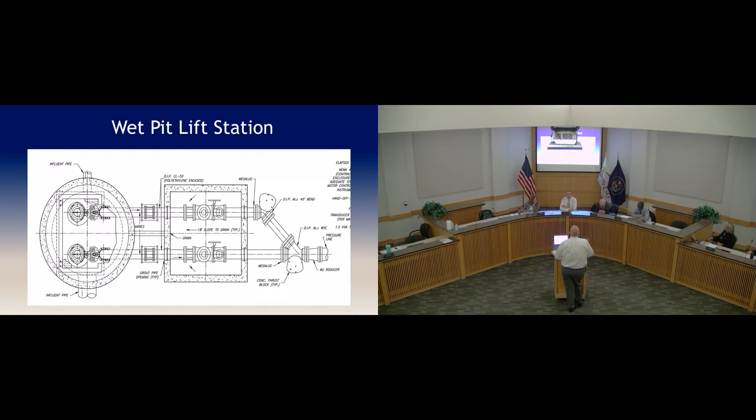The technology they have now, or at least the maintenance they've done, is they put the pumps on rails, so it's easier now to get the pumps out of the lift station using the rail system, as long as the rail system doesn't get beat up with the wastewater and the gases.

So stainless steel is always a good option when you put this kind of stuff together. The stainless does a lot better in wastewater than galvanized, which gets eaten away, and after 10, 15 years, you don't have rails anymore because they've disintegrated.

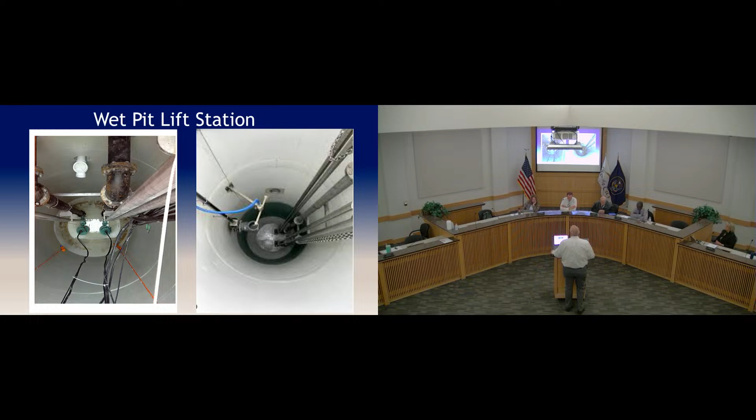So that's kind of a wet pit lift station. And then we go into the dry pit lift station.

Now I've got my engineer drawing, it's kind of busy, it's got a lot of stuff right there. But basically I just want you to see that it has two vaults, a wet well and a dry well. The dry well is where the pumps are, the wet well is where the wastewater is located. It just has basically a pipe that goes over to the wet well that comes from the pumps. So there's not a whole lot of stuff in the wet well, which makes it a little easier for maintenance, but it still has two vaults that you have to contend with.

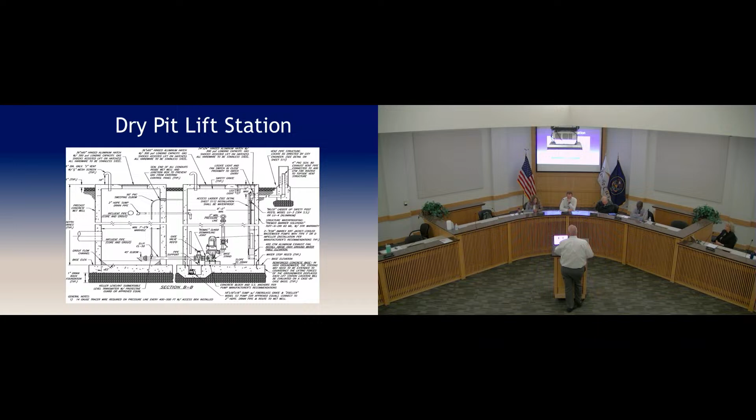So when we talk about pros and cons, it gives you an idea of some of those pros and cons when we get to that point. You might have some questions then.

There's several styles we can do this with, so your options are kind of endless, however you want to set it up. Depending on if you want square vaults, rectangle vaults, or still do a manhole style wet well with the square vaults, you can custom make a lift station this way fairly easily. So it does give you a lot of options.

And then the other option that's come out fairly recently, a few years back, is the vacuum feed lift station, which is basically a packaged pump system that sits on top of the wet well. So you still have the manhole vault and you have a vacuum pump system sitting on top. It creates a vacuum, sucks the water up through the pumps and into the system, into the force main. So again, you don't have a whole lot in the wet well, all your stuff is sitting on top.

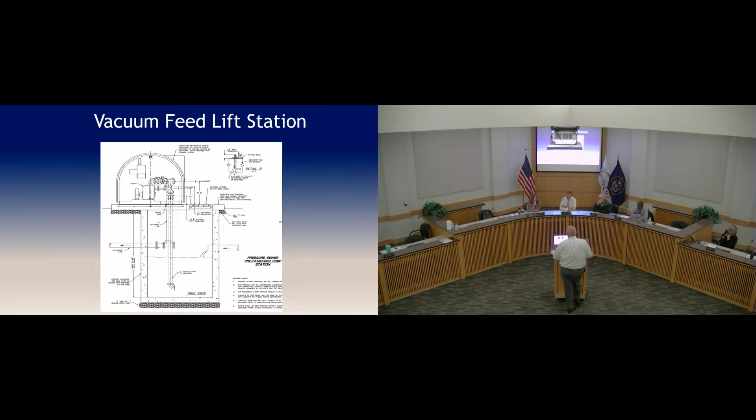Okay, so that's our 3 lift stations, really quick. Any questions to that point?

Kind of tell me how the dry system works, because you got one vault that's wet and one that's dry. I get the wet one, I understand that, and it's pretty simple, but...

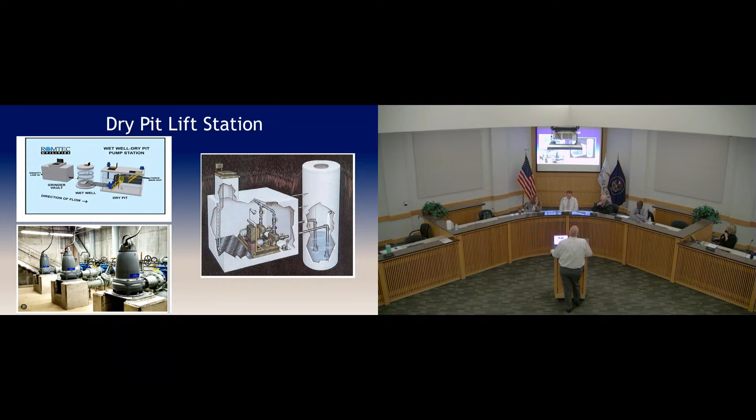You want to go back to those pictures really quick? So on a dry pit, you have your wet well, and it has a pipe that goes into the wet well. If we're looking at the right picture, you see the piping going into the wet well. Those are kind of like flooded suction pumps, so they're always kind of flooded with the wastewater. Once it gets to a certain level in the wet well, the pump kicks on and pumps that wet well down. So the pumps are still in a dry portion of the lift station, and you just have the piping going from the dry side to the wet side. Okay, yeah, I get it now. Does that make sense? Yep.

So onto amenities, I looked at some options with amenities. I come to you from previous employment where I've operated lift stations in the past, so I have a pretty good background with lift stations. I've operated the wet well type systems and the vacuum type systems.

When it comes to amenities for a lift station, it's nice to have a CMU block building located with the lift station to house all the electrical SCADA stuff controlling it. We usually do a CMU building, chain link fence, and barbed wire around the facility, along with a davit crane or a jib crane to help lift the pumps out if you have a wet well type system, or even with a dry pit you might still need to lift pumps out every so often.

Diesel generator, lighting for night work, and security of the site. And then a hard surface, usually asphalt or concrete, is desired, or a crushed concrete surface.

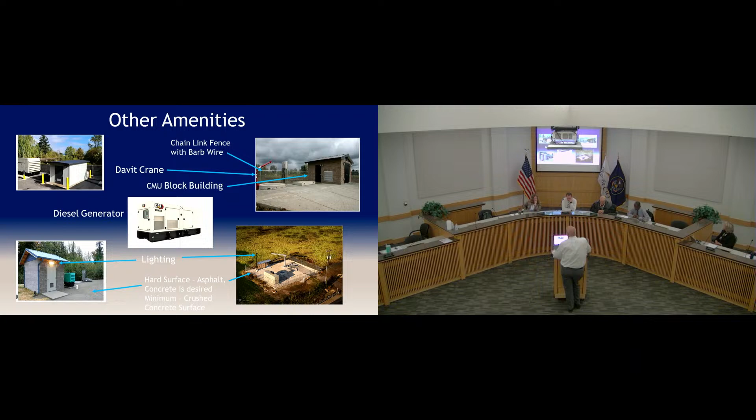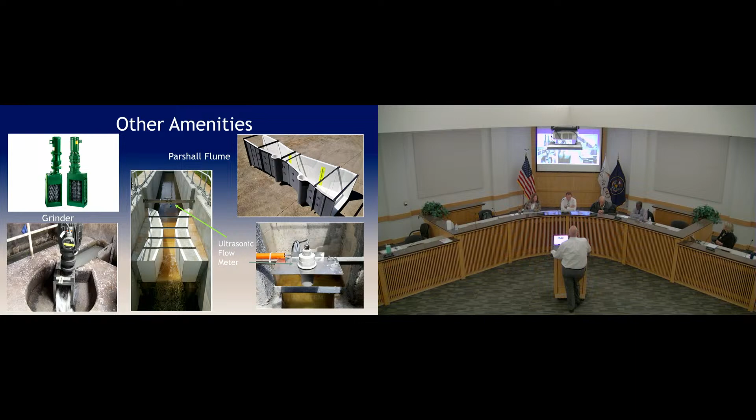The other amenity that's nice to have is a wastewater sampler. Usually with our permits, our UPDES permit for our treatment facility, we have to sample the influent and effluent wastewater streams. Sometimes that wastewater influent stream has to be sampled, and that's where the sampler comes into play. So that's always a good option to have as part of amenities.

What do we do now for the wastewater sampler? They're located at the facility itself, the water rec facility. We have two of them located there, and that's what we use. Whenever you have a lift station, sometimes you have to monitor the flow coming into it or the water quality of that lift station, so you'll have to have a sampler there as well. Yeah, so you'd want one at your lift stations, and we have to have them at the wastewater facility.

So, pros and cons of each type. For a wet pit, I could sit here and probably put 40 slides together of pros and cons for each lift station, so I just did the top three or four to give you an idea of some pros and cons of each one.

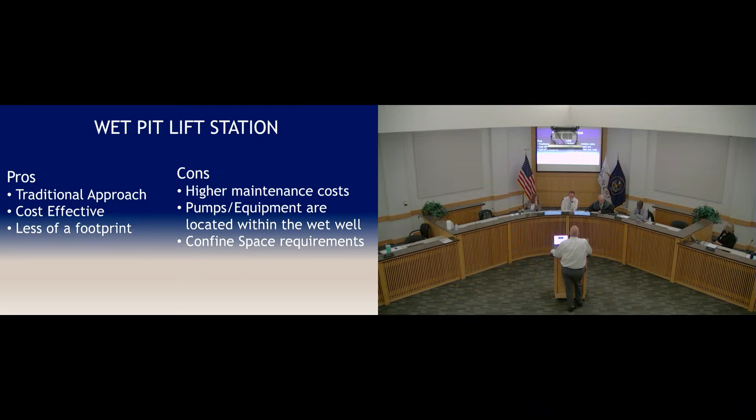A wet pit lift station's pros: it's a traditional approach, they're more common, cost effective, and the footprint is usually a lot less. The cons are higher maintenance costs since the pumps and equipment are located within the wet well, and there are confined space requirements with those. Even though you've got a pump on rails, if the rails don't work or something falls apart, you still might have to go into that wet well, so there are confined space requirements for that.

Dry pit lift station pros: the pumps and equipment are located in a dry vault, which makes maintenance a lot easier and brings maintenance costs down. We still have confined space requirements since we have a vault we still have to access, and it needs a larger footprint with the two vaults that have to be put in, so it tends not to be cost effective.

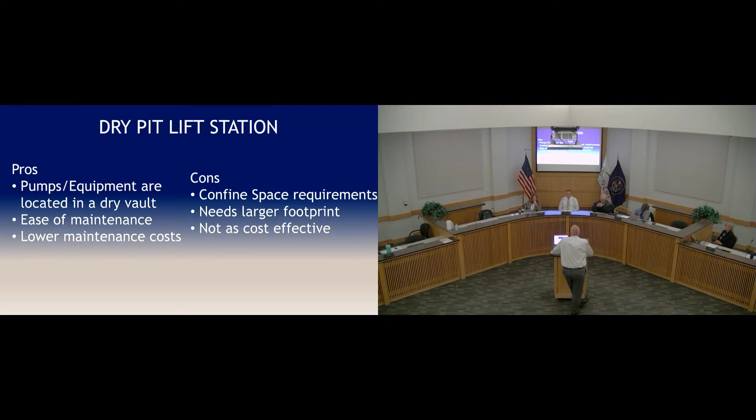For the vacuum feed, I can come up with more pros than cons. The pumps and equipment are located in the doghouse on top of the wet well, so maintenance is a lot easier with lower maintenance costs, and confined space requirements are pretty much gone or limited. It has better overall performance than the other two options I presented. The cons are it's not as cost effective and needs a larger footprint.

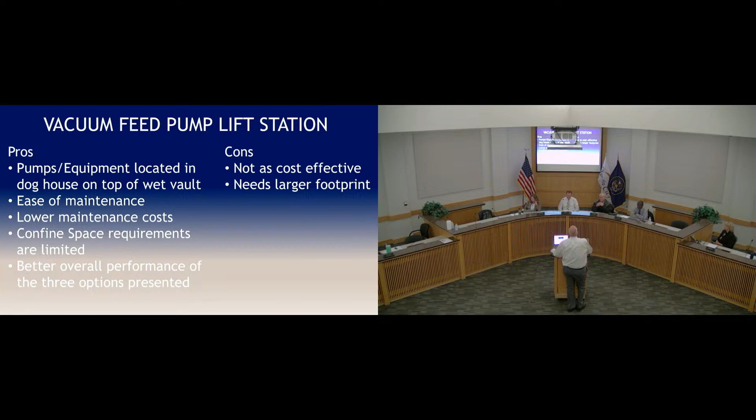As we get into cost and lifespan, I was working on this, and prior to getting slides to Loretta, I wasn't able to get this all filled out, so I just have a printout. Thank you.

For our recommendations from a public works standpoint, looking at what options we have for a lift station: although we prefer to have wastewater go into the gravity fed system, we know there are areas of the system where a lift station might be the only option. The developer will bear all costs to construct and complete the facility without any option for reimbursement or impact fee credit, as they are not part of the impact fee schedule.

Public Works recommends that we implement a city standard and spec for developer constructed sanitary sewer lift stations for all residential commercial development. When I say residential commercial development, that's any development that has residential to it. Even though I'll talk about some commercial stuff, if a development has residential to it, I think the city needs to operate that lift station for the benefit of the residents so that we maintain and can operate and keep that lift station in working order without having to depend on the developer or their management consultant to manage it.

Once the lift station has been constructed and passed off by the city, the lift station is then given to the city to operate and maintain with a minimum warranty of 1 year.

Some things at a minimum that the standard should include: we are recommending that it be a vacuum feed type pump system with dual pumps, 3 vaults, an open metering station with a grinder. We would like to have the grinder as part of our lift station, the wet well vault, and the valve vault as the 3 vaults. Also a Parshall flume with an ultrasonic flow meter, a wastewater flow sampler, and a diesel generator sized for the system for power outages.

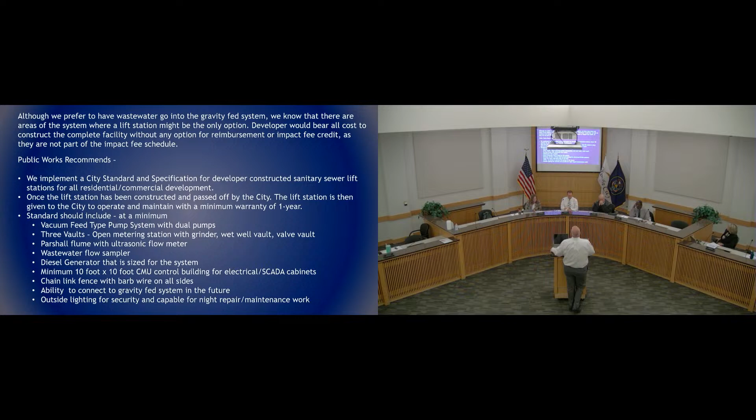Minimum of a 10-foot by 10-foot CMU control building for electrical SCADA cabinets, a chain link fence with barbed wire on all sides, and the ability to connect to a gravity-fed system in the future once development got to the point where we could gravity feed it into the system. And then outside lighting for security, capable for night repair and maintenance work.

So those are some of the minimum recommendations we had for a lift station. We still have a few in the system right now that are single commercial developments that have a lift station to them.

These are ones without residential, which are recommended to be privately owned and operated by the commercial owner, with the ability to tie into the gravity-fed system when available. We have half a dozen or so right now in town that use these type of systems, lifting wastewater into our system this way.

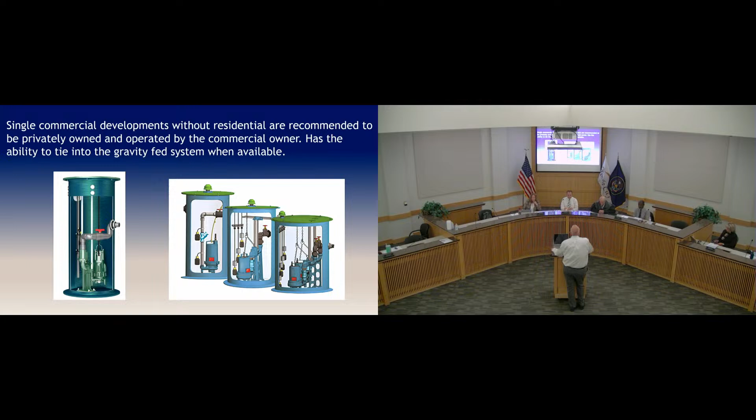If we do have just a commercial development that comes up and needs a lift station like this, our recommendation is we still go with this route. However, if we have a residential commercial development that comes in, we'd rather see a city-owned lift station be constructed and not these single ones. We don't want to have too many of the single lift stations out there like this.

I'd also like, if these are built where we have a culinary water line close by, to see a frost-free hydrant put in as well to help with cleaning activities if culinary water is available. That helps keep things cleaned and maintained.

Before we go into questions and discussions, I want to go over the rest of a couple other things on the handout I gave you. JUB did help me with a few things on this presentation, and they have some projects that they did, the year they were constructed, the construction costs and the configuration, so it gives you an idea of some other lift stations that have been done in the state of Utah and what those price tags were and what type of system they are.

Submersible being wet well or wet pit for those that say submersible. Wet pit, dry pit for those that are probably more of a dry pit system. Vacuum prime, suction lift, or more suction or vacuum type systems.

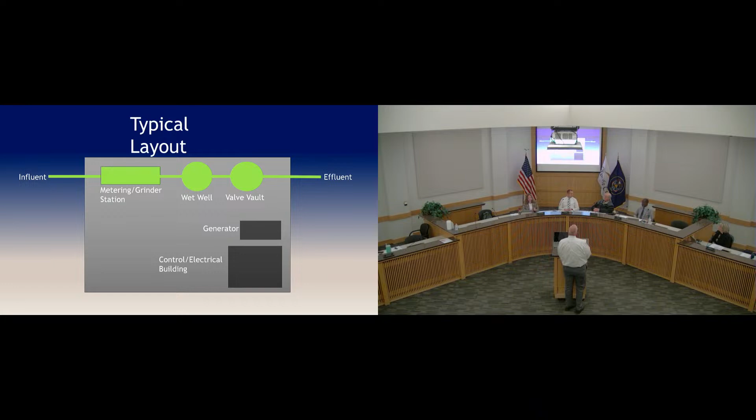Any other questions? No, I think we probably should come up with a plan. Can you limit it to the east side of SR 36, though? Limit it to whatever you want. Well, you'd only have them put it in if it was necessary, right? Right. So it would naturally limit itself, kind of thing?

Yeah, and there's development that's going to happen on the west side sooner or later. Then eventually, once 400 West gets up to 36, it'll be easier to get that wastewater conveyed into a gravity system. It's just a matter of who comes first, the west side or the east side, and getting things tied in. Sometimes you get some developers, like the east side developers, wanting to get moving now, and a west side developer wanting to move too, but not as fast as the east side.

So when they're all developed, will that require another interceptor? I don't really know how those work. Or will it just naturally feed in and be okay? I think some of that could naturally be fed in.

When UDOT did Main Street, which was 2015 give or take, UDOT did some casings underneath 36, so we have some casings under 36. We had some done at 2400, which I think those are the ones we're using now, and then there were some others that were put in the 3000 North area of 36. So there are some casings already in the ground.